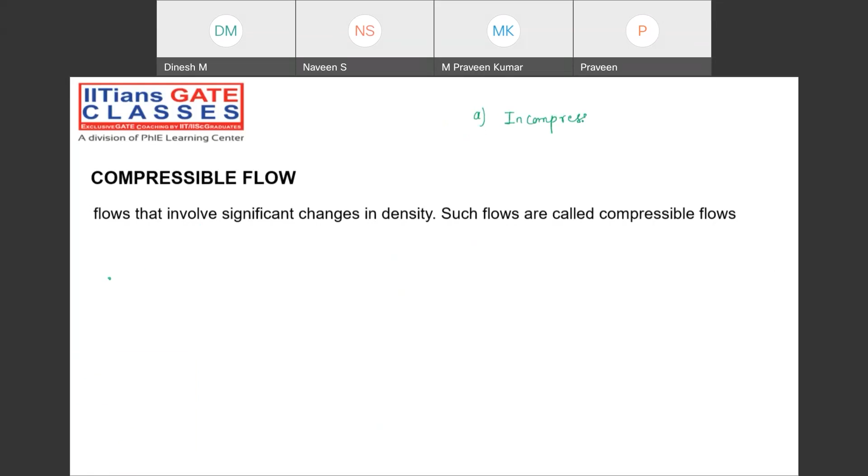First is incompressible fluid. Then incompressible flow. Then compressible fluid. So we have only two classes for this. This is the first class in which we are going to cover basics till normal shock. After that, normal shock, oblique shock, and expansion wave that we are going to cover in the next class, along with the convergent divergent section. Then we have compressible flow of fluid, and D will be compressible flow. Many times confusion will be there among these four terms only. Frequently in any textbook, you might feel confused: sometimes incompressible fluid, sometimes incompressible flow, sometimes compressible fluid, sometimes compressible flow. What is the similarity or difference between these four terms that we are going to explore now.

So tell me, guys, if I ask you, what do you mean by incompressible fluid? A very first term I will be introducing, incompressible fluid, and you must be familiar. So example, if I ask you, definitely you can say water. But apart from the example, what is the actual definition? Fluid mechanics already covered, yes or no, guys? Whether fluid statics has been covered or not - fluid property, fluid statics, and before that fluid kinematics. Then you can easily answer. I think there only we have discussed about incompressible fluid. There we defined one term. By means of that term, we are saying that if it is infinite or if it is finite, then what is the category of fluids?

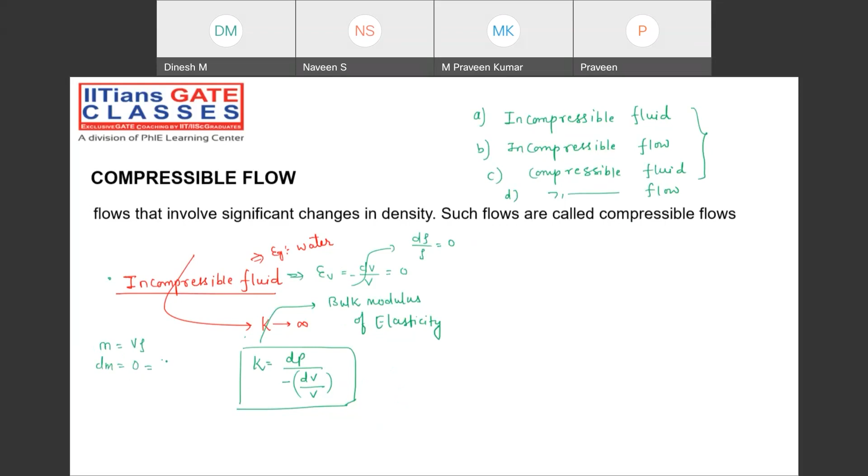Because what is the mass? Volume into density. Now if I differentiate, mass cannot be a variable quantity, it can be fixed only. So V into d-rho plus rho into dV must be 0. So d-rho by rho will be minus of dV by V. So if that's going to be 0, this is also going to be 0 for the water. And that's the reason, my dear friend, if this term is 0, then this term will be infinite. Am I right?

Tell me guys. Perfect. But the moment I will be asking you about incompressible flow, these are very few minute, very micro differences between these two. Sometimes you might be thinking that incompressible fluid will always be incompressible flow.

Yes, you are correct, but the definition of incompressible flow and incompressible fluid is different. If somebody asks you what is the meaning of incompressible fluid, you must say the bulk modulus of elasticity is going to have a large value. How much large? Infinite value. But if somebody asks you what is the meaning of incompressible flow, then you must answer: volumetric strain rate must be 0.

Sir, what is a volumetric strain rate? Volumetric strain rate is the summation of the linear strain rate in x direction, linear strain rate in y direction, and linear strain rate in z direction. Let me write once again. Volumetric strain - I think you have studied strength of materials also, right? Strain in x direction, strain in y direction, strain in z direction - they must be equal to 0.

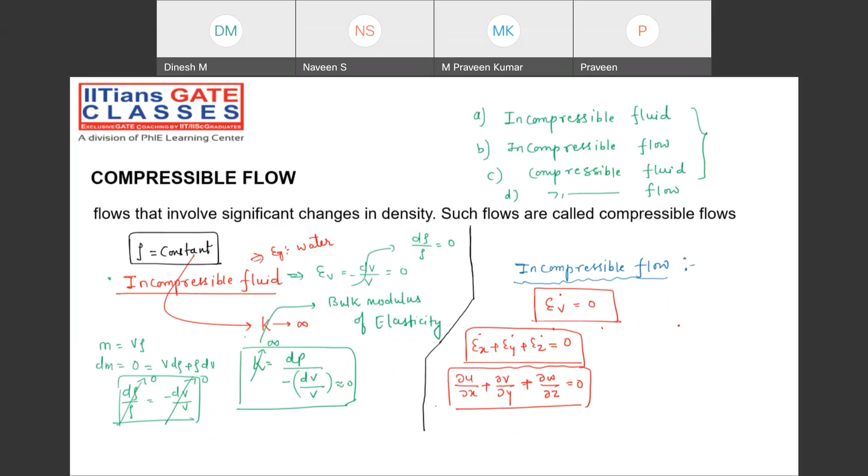Tell me guys. But does it always guarantee that whenever there is incompressible flow, that will always be incompressible fluid? Two questions I'm asking. If there is an incompressible fluid, that fluid whenever it is flowing, will it always remain incompressible flow? But one more question is there: if suppose any cross section or any place where incompressible flow is there, will that always resemble incompressible fluid, or can the incompressible flow be the compressible fluid also? Understanding what I'm asking?

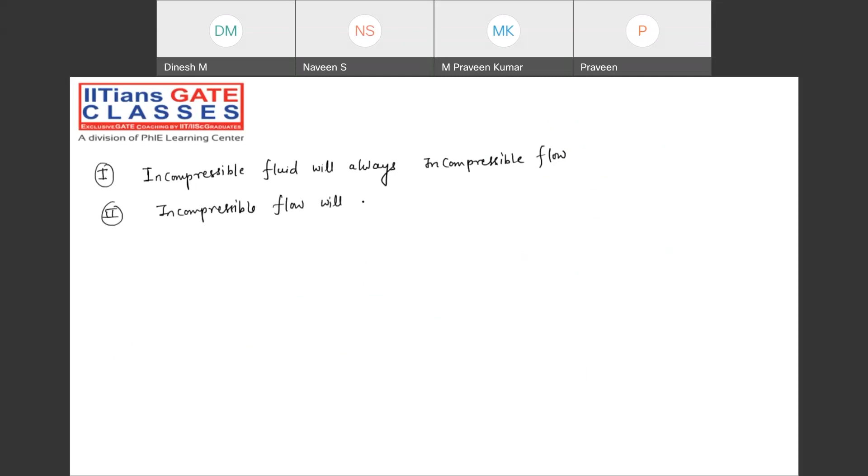Let me just summarize. Do not confuse, just see. I'm asking that: first statement - incompressible fluid will always be incompressible flow. Second statement - incompressible flow will always be incompressible fluid. Now tell me guys, whether true or false, you need to tell me.

I have given option 1 and 2 - that means the statements I have given, 1 or 2. You need to just tell me whether first is true or second is true, first is false or second is false. Most fundamental thing before discussing further about compressible fluid flow - you must be able to understand the difference between fluid and flow. That's very important, guys.

Now somebody will ask me, sir, what is the meaning of incompressible flow? The flow that has zero volumetric strain rate is called incompressible flow. Note down - is called as.

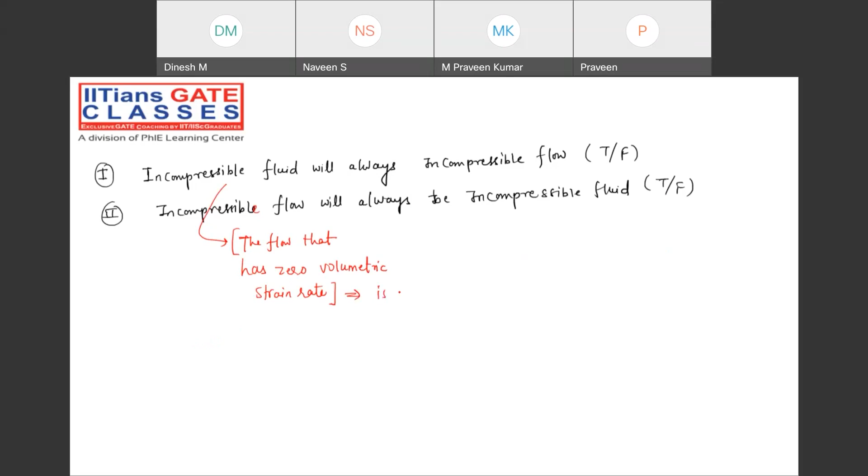Now those who have noted down the definition, please look back at the question - is called as incompressible flow. Tell me guys, very important. So again, I'm hoping that all of you are understanding. All of you understood the continuity equation, right? Generalized three-dimensional Cartesian coordinate continuity equation - all of you are aware of those equations? Fluid mechanics - all of you are aware of those equations?

So Naveen, whatever you are saying, try to reverse it. First is false you are saying, second is true - but that is not correct. First will always be true, and second will not always be true. Sometimes it can be incompressible fluid, but sometimes it can be compressible fluid also. Understanding?

So we will understand, we will try to explore these things. Do not worry about those things. So now once it is done, let me know - all of you have noted down?

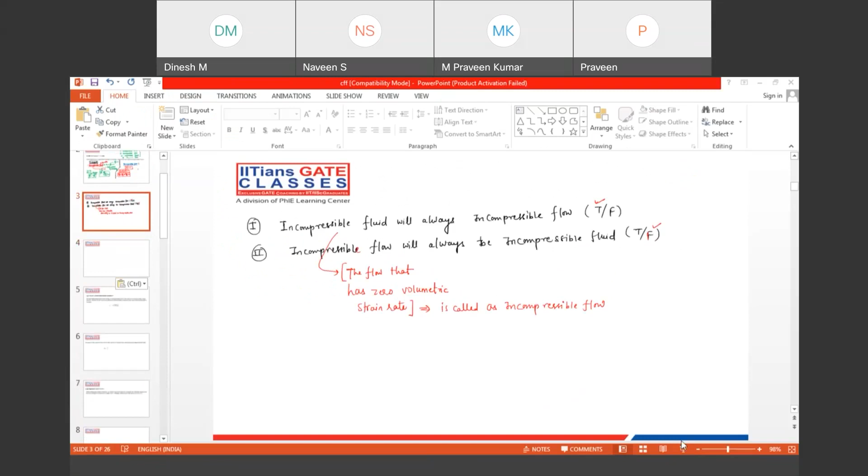So today's lecture will be an eye opener for whatever the reality actually is. Whatever the Bernoulli equation and whatever fluid mechanics we have learned, that is actually based on hypothetical assumptions we are making, that things will always be incompressible, but that is not always true.

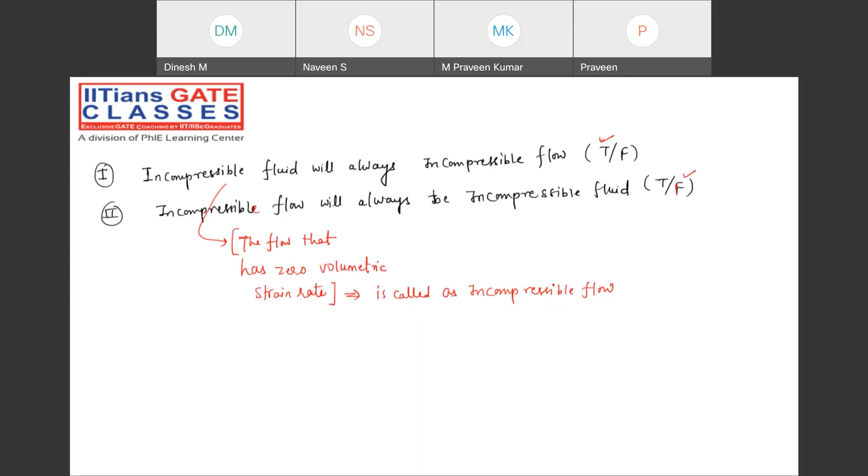Now, done, all of you? Remaining guys, are you understanding or not? Any difficulties? I'll make sure all of you can understand the concept by the end of today's lecture. Do not worry. Done? Done, all of you? Remaining guys are there? What about those guys, Praveen as well as Praveen Kumar? Are you understanding or not? Tell me, guys, I'm not getting any response from both of you. Yes? All of you can hear me? Okay, fine. But are you understanding or not? Okay, now try to understand.

I'm writing the continuity equation, and I believe you must be able to understand this continuity equation very thoroughly. Three-dimensional Cartesian coordinate continuity equation.

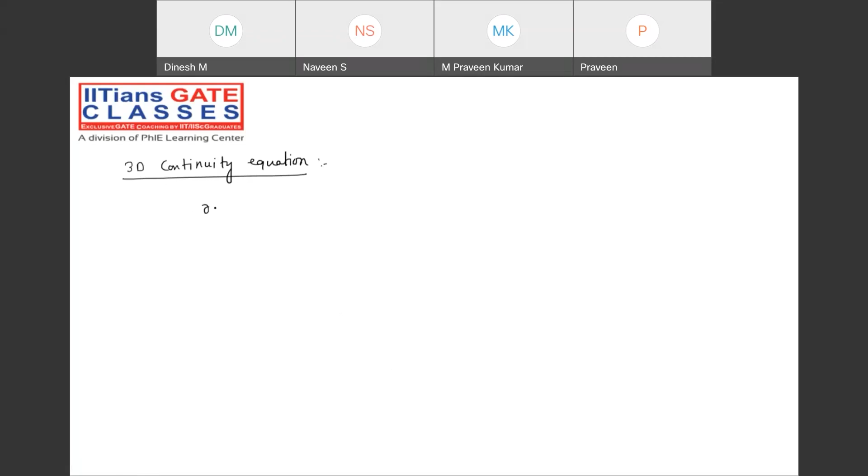So whatever we are learning now is just an extension of the chapters we have already concluded, right? So if I write the continuity equation: dou rho by dou t plus dou by dou x of rho u, rho v, dou by dou z of rho omega, that is equal to 0.

Now if I try to explore this, dou rho by dou t, plus u into dou rho by dou x plus v into dou rho by dou y, plus omega into dou rho by dou z, that is one term, plus rho into dou u by dou x, dou v by dou y, and dou omega by dou z.

U, v, omega is what? The velocity vector. Velocity vector is u i cap plus v j cap plus omega k cap. This is the velocity vector in the three-dimensional Cartesian coordinate system, that means along the x-axis, along the y-axis, and along the z-axis.

All of you are aware of this equation or not? These two equations give us what? This equation - this is the three-dimensional continuity equation. Perfect, my dear friend.

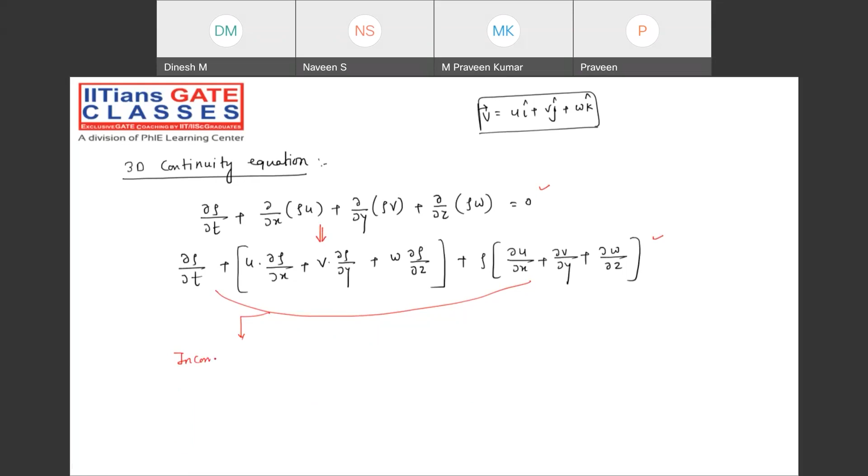From here I can conclude two things. What are the two things I can conclude from here? One, suppose there is an incompressible fluid. That means density will be constant.

If density is constant, my dear friend, then whether you differentiate it with respect to time or with respect to any space coordinate, it will be 0. Am I right? Will be 0, right? Check it out, please. All of you, please check it out.

If that goes to 0, this term will be 0. This whole term will be 0 for this particular incompressible fluid. That means what can we infer from here? We get dou u by dou x plus dou v by dou y plus dou omega by dou z equal to 0.

Indirectly, we are moving towards the volumetric strain rate being 0. That means whenever any fluid is an incompressible fluid, it will always be an incompressible flow. Remember, we are talking about the flow.

That means per unit time, things change very frequently. That's why we define not volumetric strain, but volumetric strain rate, because volumetric strain is more significant in solid mechanics, where there is a fixed amount of deformation. But here, even if you apply just 1 Newton of force, the fluid element keeps on deforming continuously. In fluid mechanics, in the first chapter, you might have learned the difference between solid and fluid properties - fluid is an element which deforms continuously under the action of even a small shear force.

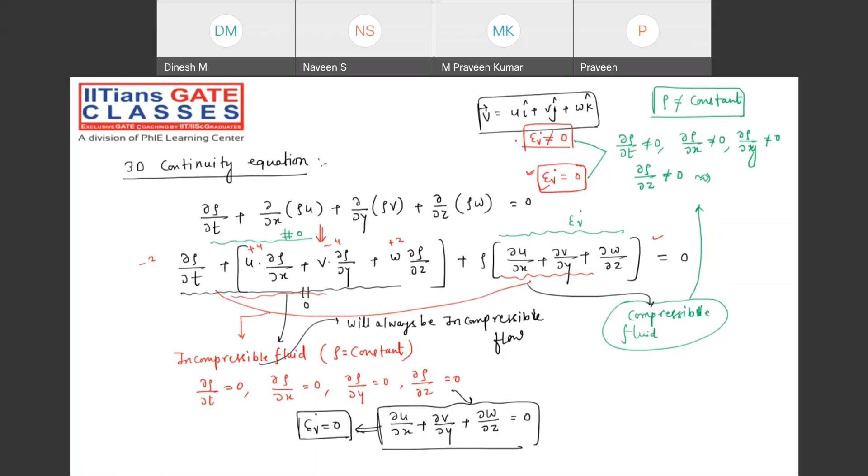Or they will be having such non-zero values so that they will not cancel out with each other and they will not be equal to 0. If that will not be equal to 0, this term will not be equal to 0, this term will also not be equal to 0. In that case, volumetric strain will not be equal to 0. And if that is so, then this is called compressible flow.

And this is nothing but incompressible flow.

So compressible fluid will never guarantee the flow to be what? Compressible and incompressible—it can be anything. But if there is an incompressible fluid, it will always guarantee you that you will be getting incompressible flow whenever it is flowing, either it is flow over the flat plate or it is flow through pipes. Check it out.

All of you, please check it out, whether you are understanding or not.

So these things, if you try to learn from books—suppose Frank M. White or Cengel, Yunus Cengel, or T.K. Naik, or K.L. Kumar—you will not find that much clarity, even though they have given everything in detail, but you need to read multiple times. Again you need to waste a lot of time searching whether it is a compressible flow.

Sir, what is the meaning of incompressible flow? That clarity is not there when you read the textbook, right? Even standard textbooks, even NPTEL videos—that is my challenge—you'll be having difficulties, because when I used to learn these things, I had the most challenging task to find the difference between this type of fluid and flow.

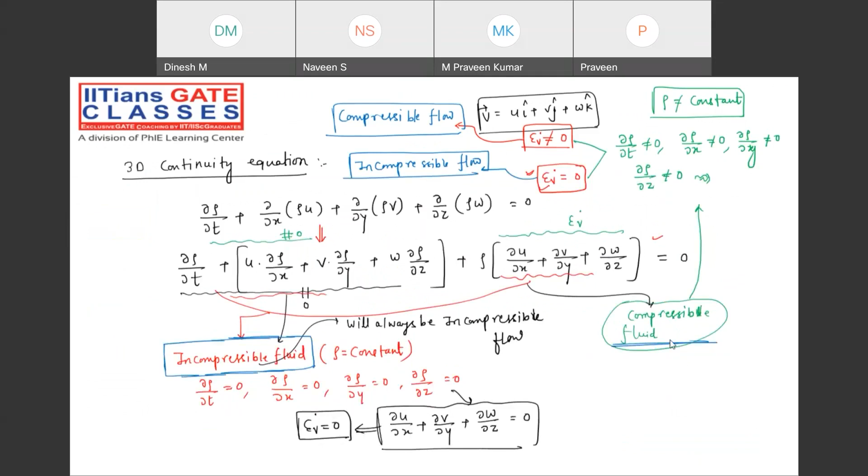So, before development of this speed of sound, does anybody know the difference between ideal fluid and ideal flow?

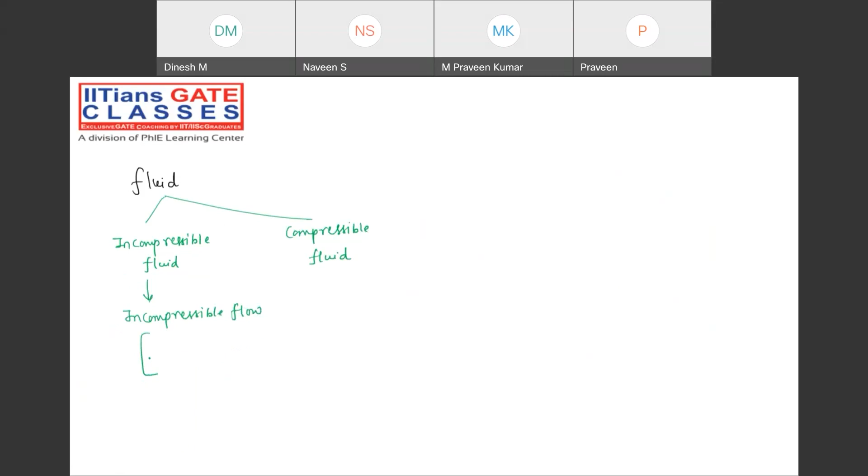So note down, guys: we have the fluid. The fluid can be compressible fluid, or the fluid can be incompressible fluid. Suppose incompressible fluid is there, then it will always resemble incompressible flow, that will be the same as incompressible flow. That means, from now on, whenever the density change is less than 5%, we call that type of fluid flow incompressible fluid flow. Note down, guys: wherever the density change is less than 5%, we say it is an incompressible fluid, or incompressible fluid flow. On the next hand, what do we have? Compressible fluid.

Compressible fluid can have two categories: it can have compressible flow, or compressible fluid can be incompressible flow. In that case, the change in density will be more than 5%, or we can also say Mach number will be more than 0.3. In this case we say Mach number will be less than 0.3. What is Mach number and all, we will discuss, do not worry.

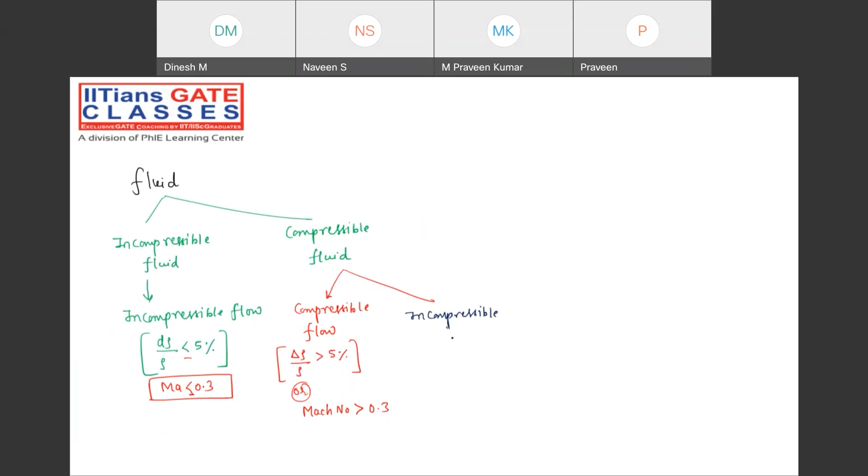Second thing, we have compressible-incompressible flow. When I talk about this, even though the fluid is having a lot of density changes, that density will not change more than 5%, it will be less than 5% only. That means Mach number will be less than or equal to 0.3. Such a fluid flow we call compressible fluid with incompressible flow. Note down, guys, very important: even though fluid is compressible, even though density has changed, that change will not be that high, not more than 5%. If it is more than 5%, we say it's a compressible flow.

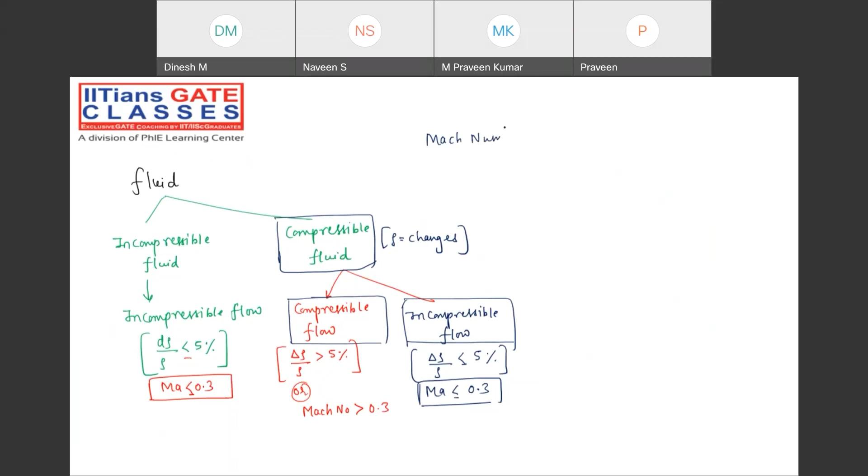Tell me, guys, so note down, very important. Here, just note down the meaning of Mach number. We will discuss it in detail later, but just note: what do you mean by Mach number? Velocity of the fluid flow divided by velocity of sound. That means we say V by C.

Speed of sound, similar to speed of light, is 332 meter per second, or 340 meter per second, or 336 meter per second - that is the value you are observing. The ratio of velocity of the fluid flow to velocity of sound is called Mach number, right?

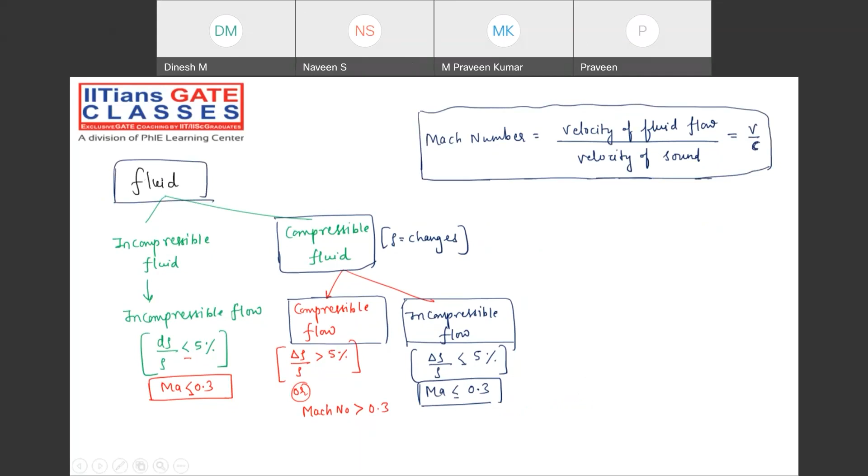Very important: so we have many types of flow, guys. We have incompressible flow, compressible flow, subsonic flow, sonic flow, transonic flow, supersonic flow, hypersonic flow - lots of flows we have.

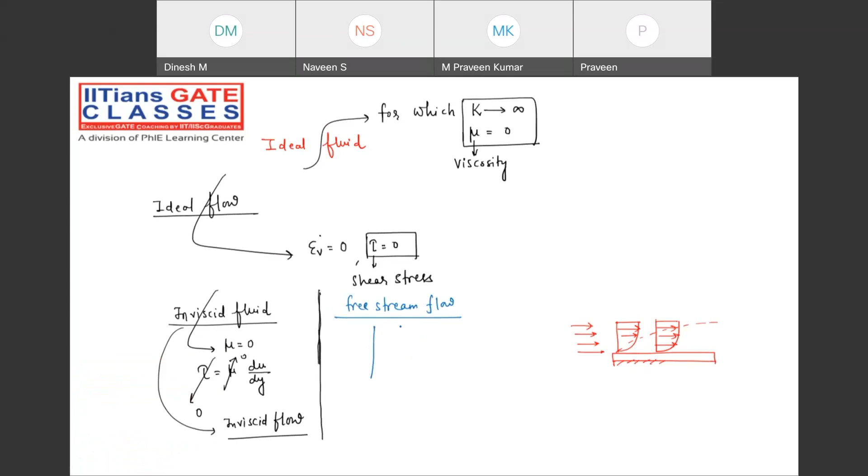If suppose you are taking free stream flow, suppose you are taking free stream flow. Free stream flow means what? Free stream flow means the velocity profile for which it will be something like this, meaning each and every fluid layer will be having the same kind of velocity.

du will be 0, du/dy will be 0, mu will not be 0. See, mu will not be 0. This is the ideal case; suppose this is a real fluid, this is nothing but a real fluid you are taking for which mu is not equal to 0. But due to some circumstances, it is making the velocity profile to be something like this. I can say that whatever flow is approaching towards this particular flat plate is free stream flow. Am I right?

Above the boundary layer, or in front of it, the moment it's touching the flat plate, that is a free stream flow. And what is the surrounding air having? Viscosity that is not equal to zero. You can check in Google, just search the viscosity of air, that will not be zero. That is going to have some particular value. Viscosity is not equal to zero, but because of that, tau will be zero again, because du by dy will be zero. That means tau will be zero. So again, it is just resembling like free stream flow resembling like ideal flow.

Note down, guys, very important: ideal flow, because tau is zero. Very important guys. So is that clear, the difference between ideal flow and ideal fluid? Both are not same, both are different, but ideal fluid will always be ideal flow.

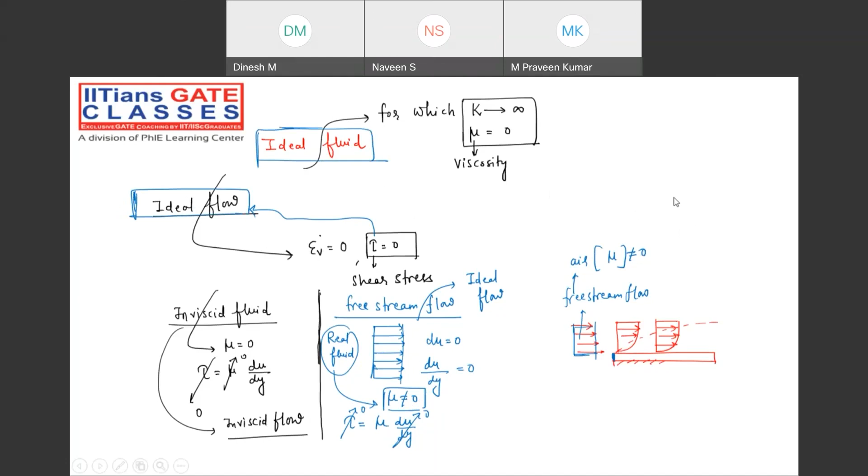But what is the physical meaning of speed of sound with respect to fluid mechanics? Tell me guys, if I ask what is the meaning of speed of sound, then what will you say? So for understanding this, let me discuss one beautiful thing about the speed of sound. Suppose you are taking a piston cylinder arrangement. Remember, speed of sound has significance in compressible fluid, not in incompressible fluid flow. Why? That also we are going to learn, my dear friend, do not worry.

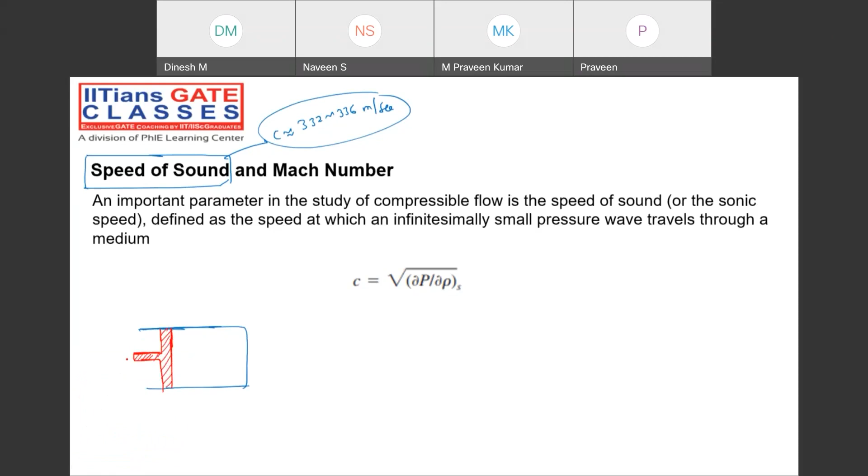So try to understand, there is a piston cylinder arrangement. This cylinder is fitted with a piston. This is what we have, cylinder, my dear friend. Now try to understand, suppose here we have the fluid, any fluid. I'm not taking compressible or incompressible, I'm just taking fluid, maybe you can consider compressible fluid.

Now, the moment you try to press this piston in the positive x direction, it is going to compress this particular fluid. The moment you compress it, then suddenly what will happen? There is a kind of wave that will propagate through the fluid medium. The moment you move the piston, there is a movement of pressure wave, or pulsating wave, or elastic wave, through the fluid medium.

Suppose somebody is not able to digest this, sir, we already learned the piston cylinder in thermodynamics, there we never came across, apart from pressure and temperature, this pressure wave or elastic wave. See, whenever you try to compress it like this, there is one kind of disturbance wave that will propagate. The disturbance wave will propagate along with the movement of the piston. The speed with which this pressure wave, this disturbance, is propagating, that is called speed of sound. The speed with which this fluid is flowing, suppose that velocity v, and the speed with which this disturbance is propagating, there is some significant correlation between this velocity and the speed of sound, and that is what we are learning in this chapter. So please note down, the speed with which this pressure wave and elastic wave propagate through the fluid medium is called speed of sound.

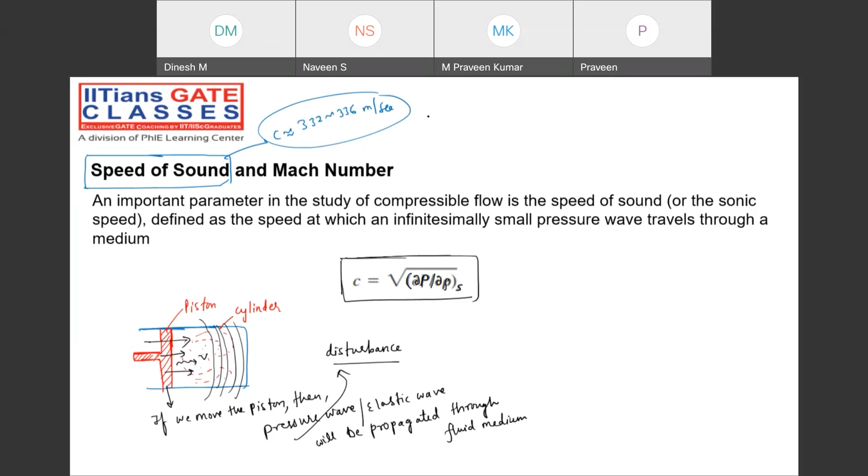Now tell me, why are we calculating the speed of sound, why are we calculating the disturbance in absence of any irreversibility and any non-adiabatic conditions? What is the meaning of isentropic flow? What is the meaning of isentropic process? What do you mean in thermodynamics about the isentropic process? Is any process called isentropic process, or is there some specialty about this process? Can I say reversible plus adiabatic process?

This is called the isentropic process. Can we call a reversible plus adiabatic process an isentropic process?

I'll ask you two statements, true or false. First statement: all reversible and adiabatic processes are always isentropic processes. Second statement: all isentropic processes are always reversible and adiabatic processes. Tell me, is statement 1 true or false? Is statement 2 true or false?

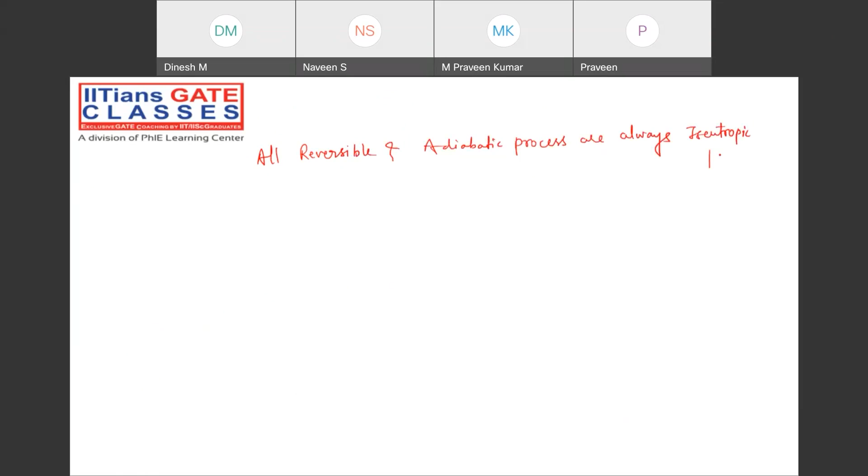I'm asking you: all reversible and adiabatic processes are isentropic processes. That is my first statement. Let me write it: all reversible and adiabatic processes are always isentropic processes. That is my first statement.

Second statement: all isentropic processes are always reversible and adiabatic processes. Tell me, guys, this is statement 1 and 2. You need to tell me true or false.

So the first statement is true, that is correct. What about the second statement? I want the answer from all of you guys. You are there, please try to respond - Praveen and Praveen Kumar, all of you. Do not sit idle, guys. Try to respond as quickly as possible.

Tell me, guys, quickly - remaining guys. The second statement is false. Why is the second statement false? There is a reason for that. Let me explain the reason.

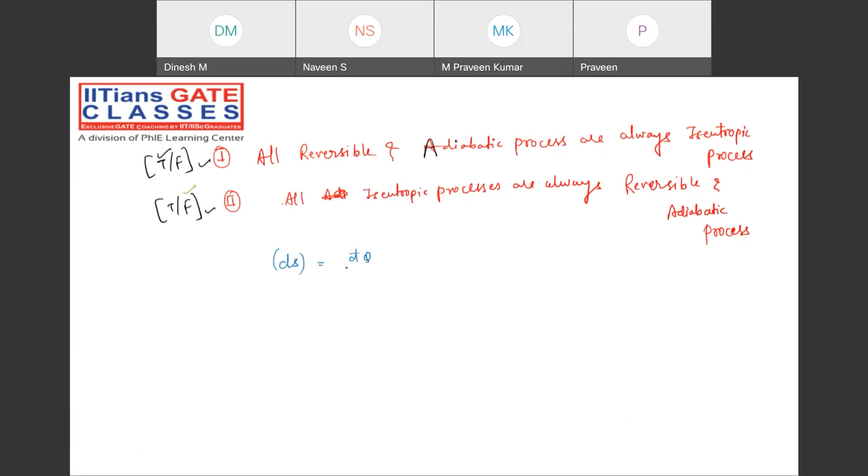What is the total entropy change for any process? Delta S of any system equals dq by T plus entropy generation. That is what we learned from the second law of thermodynamics, right?

If I say reversible, what does that mean? Entropy generation will be zero. There will not be any friction - a frictionless process will be called a reversible process. This term will be zero for reversible.

What about this term being zero for adiabatic? This term will be zero for adiabatic, my dear friend. So in short, both will be zero - we can say this will also be zero. An isentropic process is that process where the total change in entropy will be zero. Total change in entropy will be zero. That is about the first statement.

Now move back to the second statement. They are saying all isentropic processes means dS equals dq by T plus entropy generation, and this will be zero. My dear friend, this can be zero when this is minus 5 and this is plus 5 - through that also it will be zero, or this will be zero and this will be zero, and in that case also it will be zero.

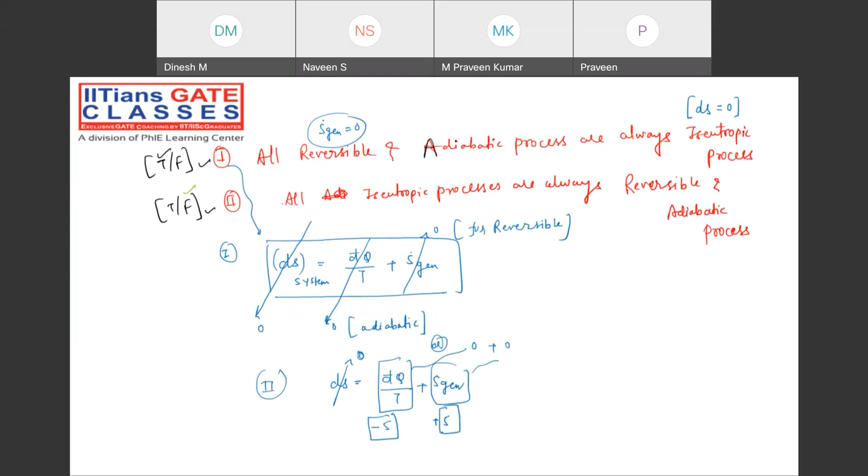But in this particular case, suppose you are talking about a situation where there is a transfer of heat from the system to the surrounding by 5 kilojoules per Kelvin, and there is some kind of friction. Because of that, there is some entropy generation happening of 5 kilojoules per Kelvin. Together they will cancel out, and again that will be zero. So for all isentropic processes, dS being zero will never be guaranteed to mean it is reversible and adiabatic, because here you are saying that it is a non-adiabatic process, right?

It's a non-adiabatic process, and because entropy generation is more than zero, that means it's an irreversible phenomena, not reversible, am I right? All of you understanding the subject or not? That's why I told you before moving to this compressible fluid flow topic, you must revise thoroughly the thermodynamics and fluid flow.

Because if you don't believe me, I'll be proving one statement about stagnation enthalpy, and there I will challenge you. Most of you will be confused about the adiabatic process and isentropic process. Those who say adiabatic process is always isentropic process are incorrect, because irreversibility can also make the system non-isentropic, right? So please note down a few basics about thermodynamics.

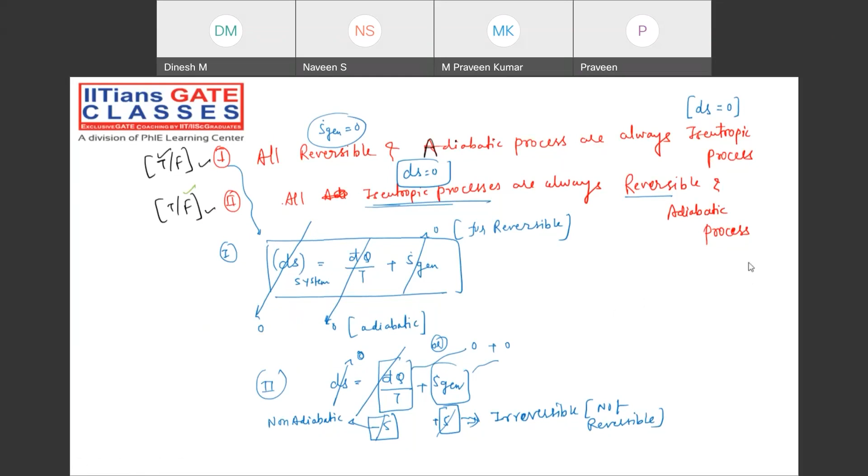So note down, speed of sound is defined as dp by d rho under isentropic condition. Now the question is why we are calculating dp by d rho under isentropic condition. When entropy is constant, why are we calculating speed of sound this way? Because in that case, it's a frictionless process, an adiabatic process. There is no friction, no heat transfer to the surrounding, so whatever the true nature of the speed of sound or the disturbance is, that can be obtained from the system.

If there is friction, the friction wave will also propagate. If there is heat transfer, that will also be seen along with this disturbance propagation. So the true nature cannot be expected from the disturbance in that case. But if it's a frictionless process, no heat transfer, a completely insulated system, then we can see the true nature of the disturbance. That's why we are calculating it this way.

In fact, we can calculate speed of sound under any condition — under isothermal condition also we can calculate it, under any process. But from the most idealistic and beneficial research point of view, if you consider the isentropic condition, you get the true reality of the disturbance or the motion of the disturbance wave, which is a very good idea, right? So that's the reason we always say speed of sound is dp by d rho under isentropic conditions. Please note down.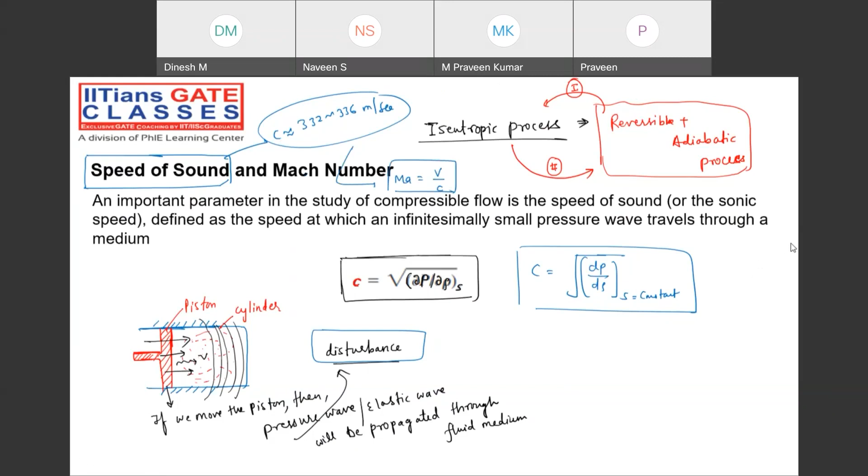And of course, we have noted down about the Mach number. Mach number is basically the ratio of the velocity of fluid to the velocity of sound. So the ratio of the speed of fluid flow to the speed of sound is defined by the dimensionless number Mach number, V by C.

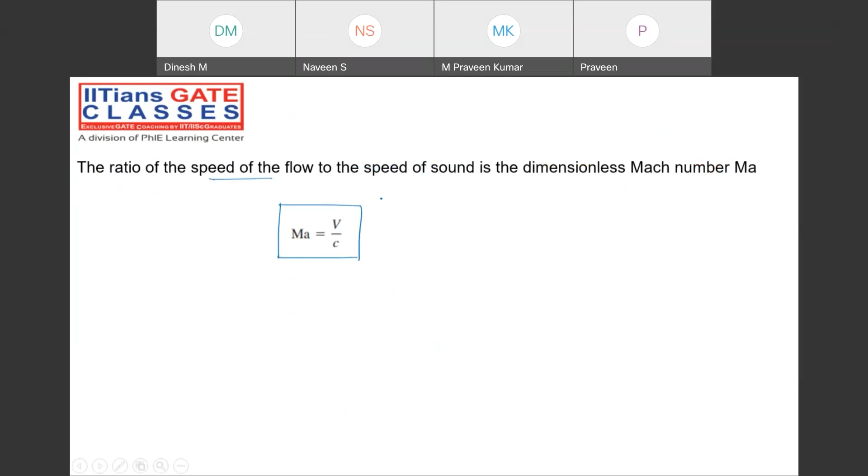Now we will try to prove the speed of sound, that is under root of dp by d rho, by two processes. One I am taking as isothermal process, and second I am writing under isentropic process. Under these two conditions, we are calculating the speed of sound.

We have to calculate dp by d rho, and we are calculating it for an ideal gas. So we are going to use the ideal gas equation. For the ideal gas equation, first, what we are going to learn: isothermal process, PV equal to constant, am I right? PV will be equal to constant. In fact, PV equal to MRT.

So P into V by M equals RT. What is V by M? Specific volume equals RT. Can I write P by rho to be constant? T is constant, that means what? Can I write P by rho to be constant? Yes, P by rho to be constant.

Perfect. Now try to differentiate. So P into -1 into rho to the power -2 into d rho, plus rho to the power -1 into dp, that will be equal to zero. So from here, what is dp by d rho? It will be brought back to that side, this particular term will be brought to the right hand side. So from here, what can we calculate?

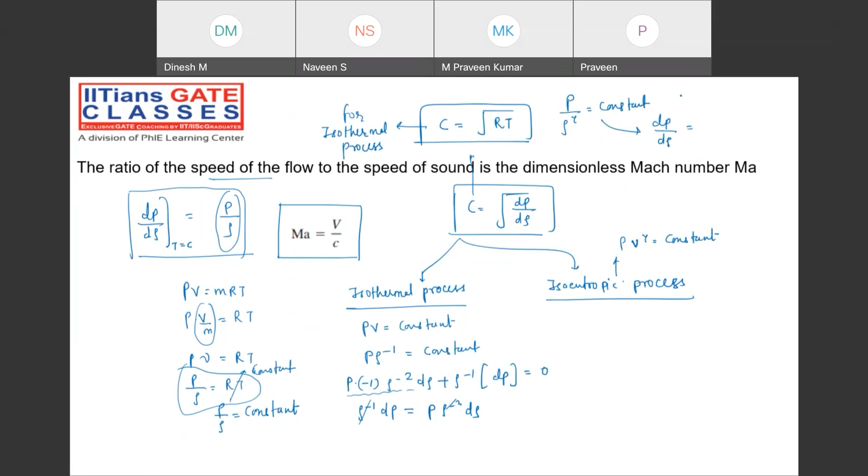Isothermal process done. Now if I talk about the isentropic process, that means P into V to the power gamma equals constant. Here, V is the specific volume, so we can also write P by rho to the power gamma equals constant. Now if we differentiate this, dp by d rho comes out to be gamma P by rho.

So the C value for isentropic process will be under root of gamma RT, where gamma is the specific heat ratio. We also call it the adiabatic index, right? So these are a few terms coming from thermodynamics that you must understand.

So now we have two formulas for the speed of sound. One is for the isentropic process, and one is for the isothermal process.

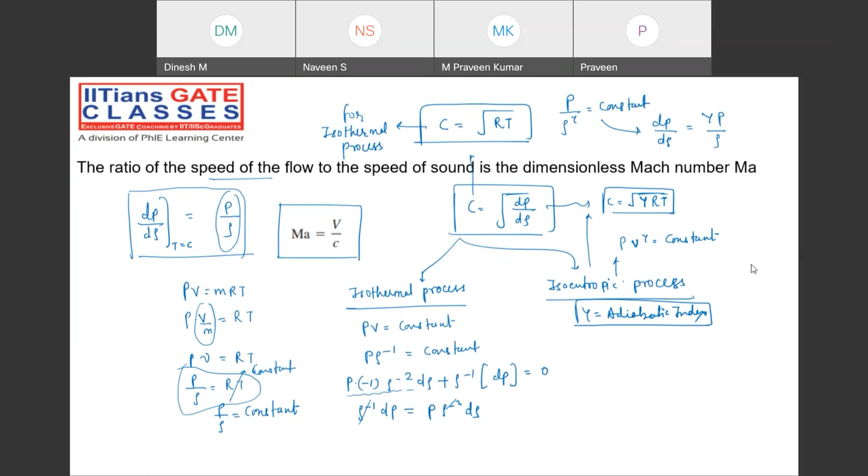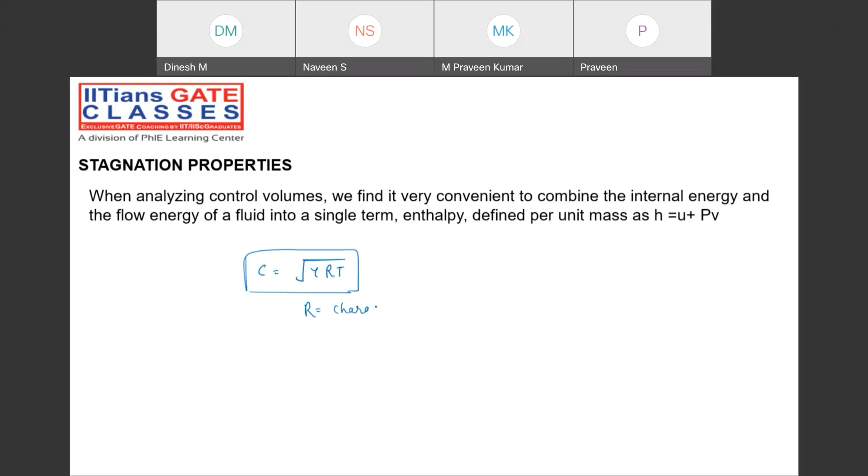Now, before understanding stagnation properties, we will understand gamma RT, under root of gamma RT. What is the meaning of this? In this, R will be the characteristic gas constant, and that is equal to Ru by capital M, where M is the molecular weight. So from here, what can you calculate? Speed of sound.

What conclusion can you make? If molecular mass is more, then R will be less. R will be less, so C will be less. That means lesser mass, more will be the sonic velocity. Lesser mass means more sonic velocity, or you can also say more mass means less velocity.

Speed of sound we also call sonic velocity, right? All of your understanding this?

One more question they have asked in the ISRO examination: is the speed of sound more in a warm season or a cold season? In which case, hot environment or cold environment, will the speed of sound be more? So through this you can answer: when the temperature is more, the speed of sound will be more for constant gamma and R. This question was asked in ISRO, I think in 2016.

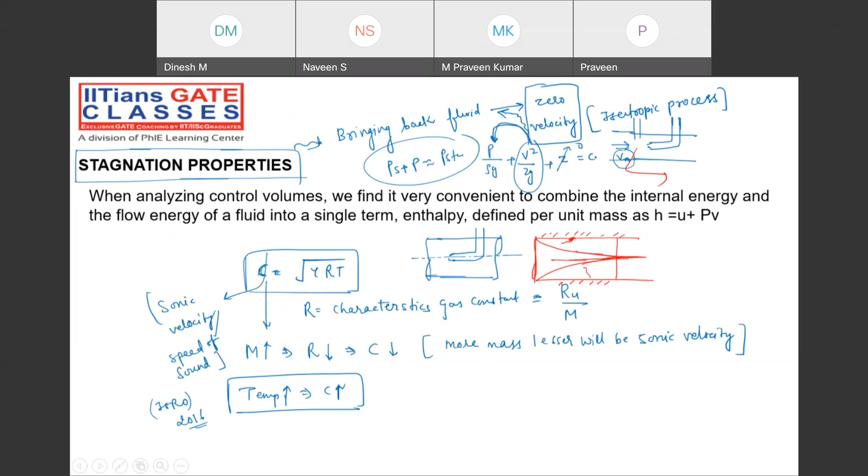So guys, let me ask you one more question. So we have understood the pitot tube, right? All of you have understood the pitot tube, right? Tell me, guys. So can I ask you one question? Very basic question, very basic, but very, very important question.

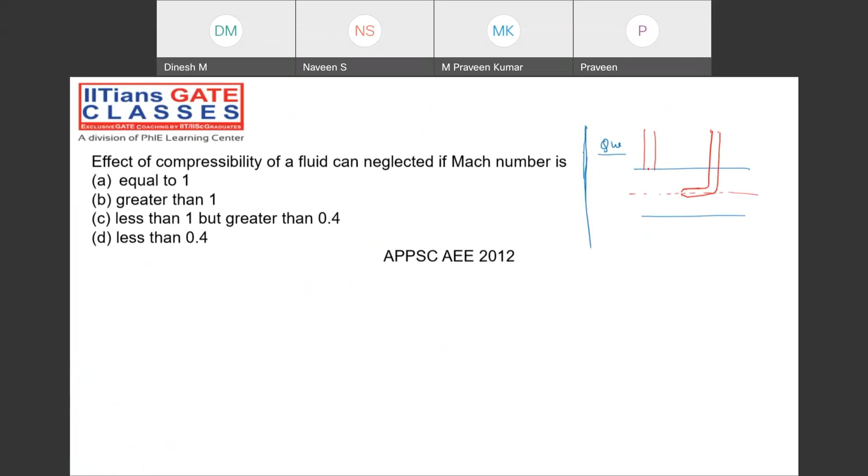This is the pitot tube, which is placed with the piezometer. Now tell me, guys, fluid is flowing with some velocity V. My question is, what is the discharge through the pitot tube? What is the value of the discharge through the pitot tube? So here, let's suppose the rise of height is h1. Here also the same height is there, but an additional rise is there because the fluid is brought to rest condition, and that we call h2. Here also the same, it is h1. So here I can ask you two questions.

That is the first question. Second question, what is the discharge through the pipe? So for both, I'm giving option A. Now forget about this question, focus on the question I mentioned right now. The discharge value will be under root of 2gh2. Suppose the diameter of the pipe is d.

That is the one value. Option B: discharge will be under root of 2gh1, pi by 4 d square, and pitot tube is going to have the diameter. Here the diameter is what? Let's suppose d2.

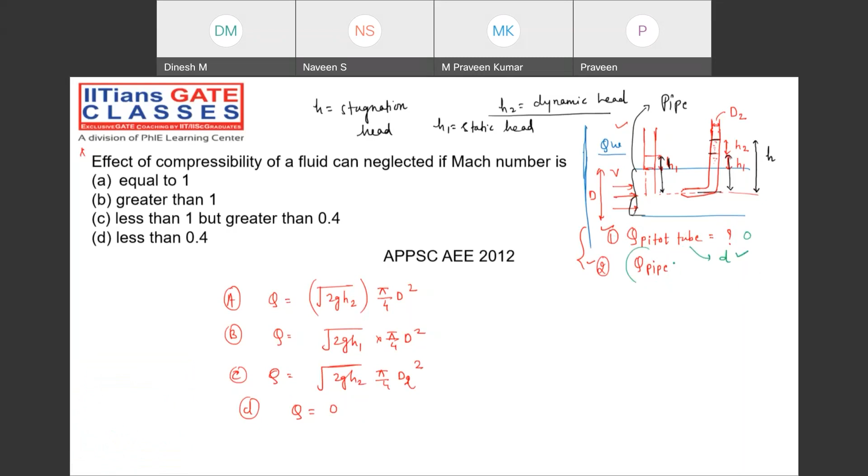Absolutely correct. And what about the pipe? Pipe, you know that area into velocity, and you know how to calculate the velocity: under root of 2gh dynamic. And here, what is the dynamic height? h2 only, right? So can I say this option will be A for the second one?

Area into velocity. What is the area? Pi by 4 d square. That will be the correct answer.

Because suppose if you have not understood like this, only understood the formula of velocity by applying the Bernoulli equation between point 1 and 2, you are in the wrong path. In the GATE examination this year, what question did they ask? They have given the pipe, and in that they have placed a uniform diameter tube.

Most of the candidates thought that it is a pitot tube. It is not a pitot tube. They mentioned clearly in the problem that it is a uniform diameter tube. That means here and as well as here, the diameter is same. When the diameter is same, how dare you say that the fluid element will be brought to the rest condition?

Here the fluid element, you can say it's brought to rest because of the very, very narrow area. The fluid is flowing like this, but it cannot flow through this particular pitot tube. Very slowly it will flow, almost with a negligible velocity.

Here, whatever the tube they have mentioned, they mentioned clearly the velocity, and they ask: what is the velocity? They already mentioned what is the velocity clearly in that picture. Through that also, somebody got the idea - velocity they mentioned, that means they have some options. And the option they have given is: what is the discharge through this particular tube, they ask.

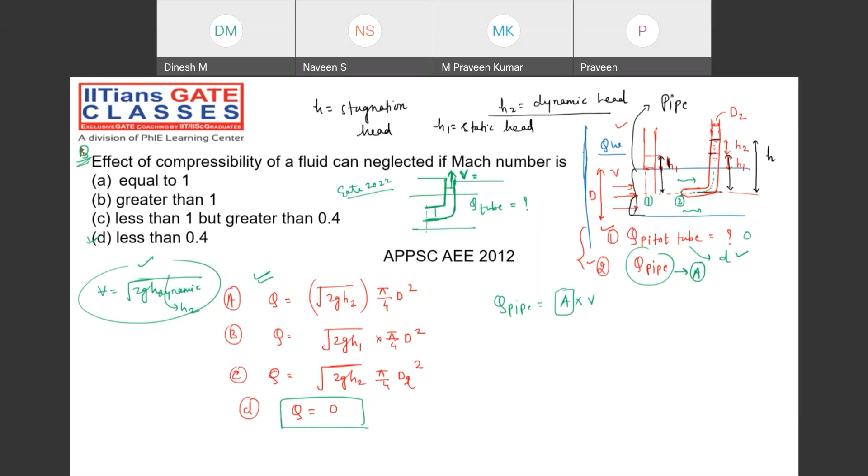Now try to answer this question and tell me the answer. Air at 300 degrees centigrade at 7 bar is expanded isentropically until the velocity is 300 meter per second. Calculate the static temperature of the air at the high velocity condition.

That is a very good question. Those who understood fluid mechanics can answer this comfortably. But before that, you must understand what is the meaning of static temperature and stagnation temperature. So just wait, let me discuss one important point, then we can discuss this question.

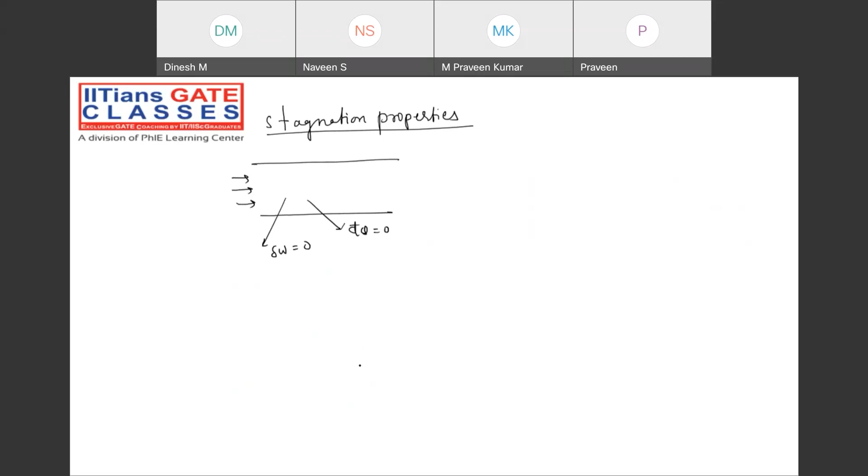Now try to understand stagnation properties. Consider the flow is flowing through the duct. Consider a fluid is flowing inside the duct where the work done is zero and there is no heat transfer. In that control volume, if you just consider the control volume in that pipe, the work done is zero and there is no heat transfer. Apply the steady flow energy equation.

All of you know the steady flow energy equation between points 1 and 2. I'm assuming the flow to be steady, not unsteady. Now, while applying the steady flow energy equation: H1 plus V1 squared divided by 2000, plus delta Q, is equal to H2 plus V2 squared divided by 2000, plus delta W. Delta Q will be 0 and delta W will be 0.

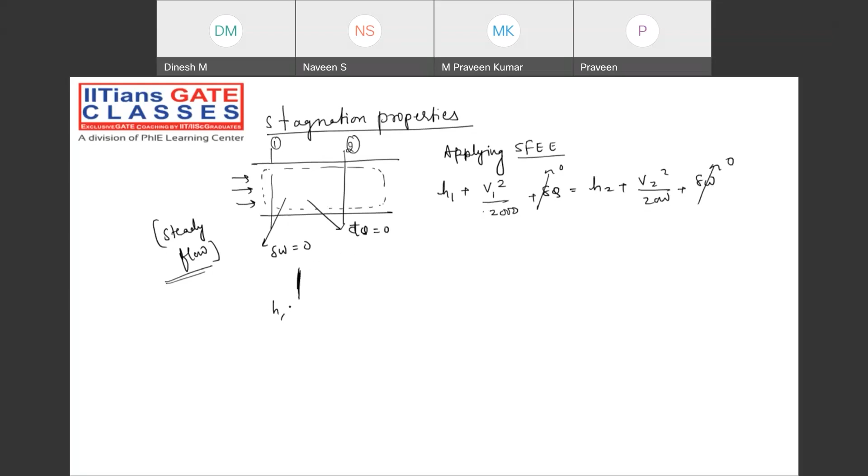Suppose, my dear friend, at condition 2 we are bringing this fluid element to rest. At point 1 we have properties H and U, but at condition 2 the velocity is 0. Then whatever H2 is, that H2 will be converted to stagnation enthalpy.

So what is stagnation enthalpy? It is basically the summation of static enthalpy and kinetic energy. Note down: we can simply write H stagnation as H plus U squared by 2. Whenever the fluid is brought to rest condition, we call it stagnation enthalpy, and we represent it by H naught. Very, very important, guys, note down.

Suppose in any device there is no heat transfer and no work done. Then what happens? H1 plus V1 squared by 2 equals H2 plus V2 squared by 2, and potential energy we have neglected. Under this condition, this is nothing but H01 equals H02 — stagnation enthalpy at point 1 will be equal to stagnation enthalpy at point 2. Check it out, all of you please verify it.

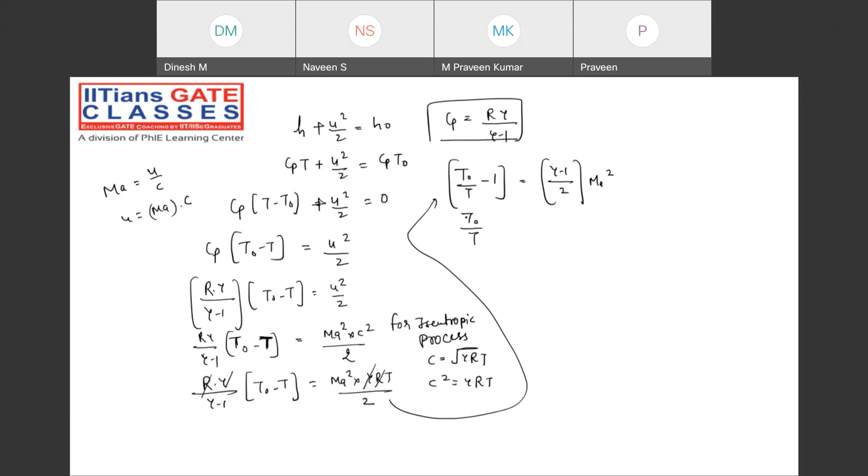T naught by T minus 1, that will be equal to gamma minus 1 by 2 into Mach number square. So T naught by T equals 1 plus gamma minus 1 by 2 Mach number square. Check it out - this is a very, very important formula, guys. Many times in ISRO examination, they have asked this question. This is the relationship between static temperature and stagnation temperature.

Static temperature - relationship between static temperature, stagnation temperature.

Understanding my point? Suppose fluid is flowing, whatever the temperature of the fluid is there, that is the static temperature. Suddenly it is brought back to the condition where the velocity is zero. Whatever the rise in temperature will be there, that is what T naught. Understanding my point? Whether these fluid mechanics things are clear or not, tell me guys. Yes, perfect, perfect. So stagnation temperature will always be more than static temperature.

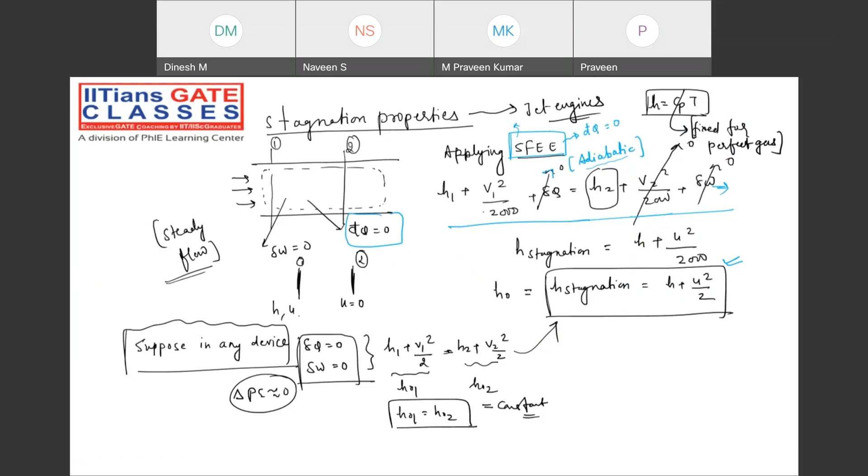So that's the reason from there only we derive this condition. That's why we are saying it is valid for reversible as well as irreversible process also. Note it, guys, very very important.

After that, we will be moving on to the relationship between stagnation pressure and static pressure. So one formula is this one. This is very, very important.

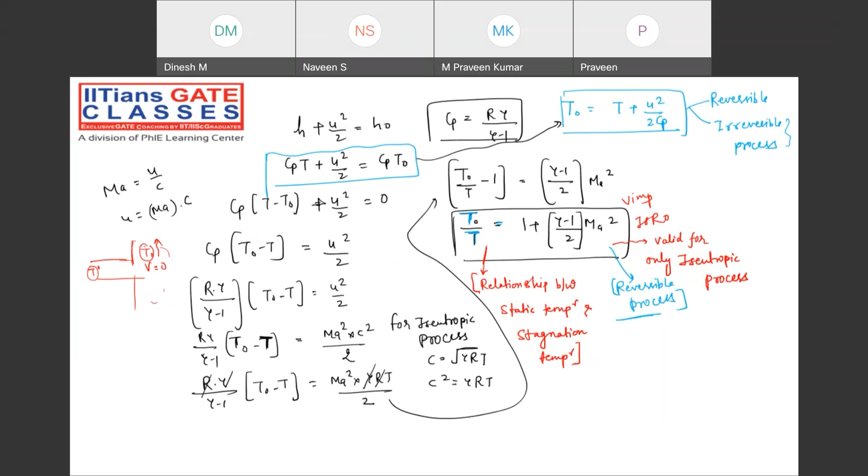Done, all of you? Can I move to the next segment? Perfect, perfect. Now try to understand.

For isentropic process, let me give you one important tip. Whatever PV to the power gamma, PV to the power gamma is valid only for isentropic. So those who are thinking it is valid for adiabatic process - no, no, no. For applying this, the process must be reversible and adiabatic. So please note down, it is only valid for isentropic process.

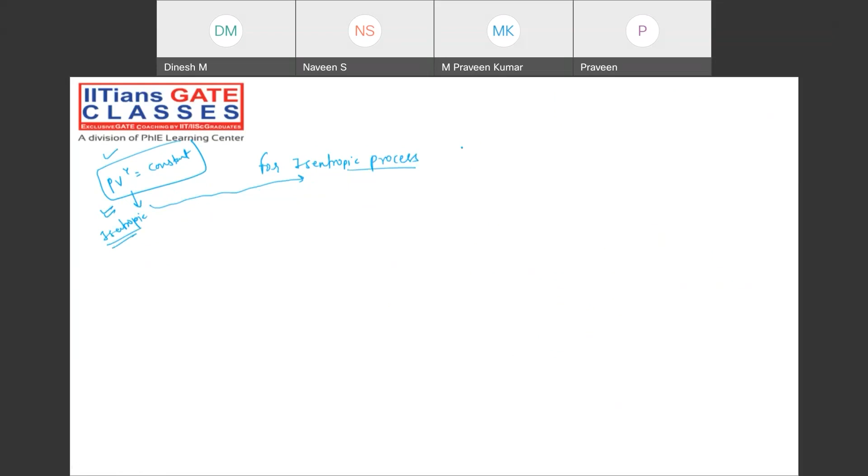So there is a misconception that it is valid for adiabatic. No. For isentropic process, we know that T2 by T1 equal to P2 by P1 to the power gamma minus 1 by gamma.

So from here, what we can write? Suppose T2 is a temperature where the fluid is brought to the rest condition. So we can write T naught divided by T equal to P naught divided by P to the power gamma minus 1 by gamma. So P naught divided by P can be written as that power gamma by gamma minus 1. Very, very important, guys, please note down - the relationship between stagnation pressure and static pressure.

The relationship between stagnation pressure and static pressure. Now, if you just want to write in terms of Mach number, that also you can write. T naught by T from the previous formula: what is T naught by T? 1 plus gamma minus 1 by 2 into Mach number square.

So you can write from here also, my dear friend, raised to the power gamma by gamma minus 1. That also has been asked multiple times in ISRO examination. Very, very important, guys. Once it is done, let me know.

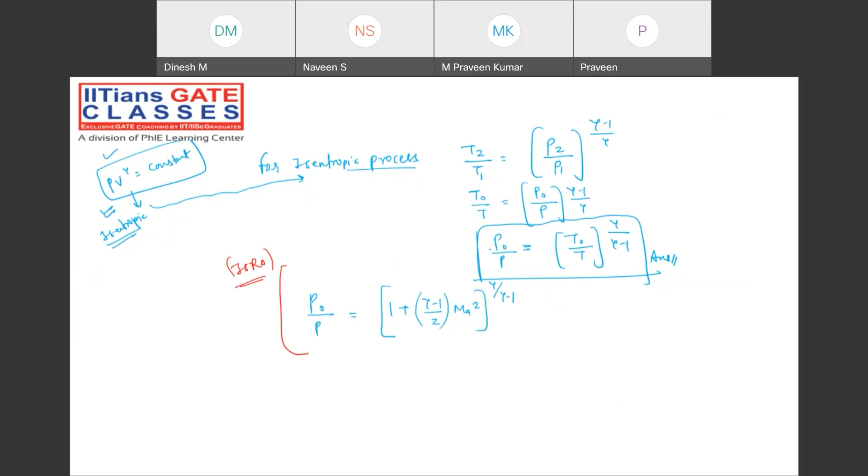Done, all of you? Is it done? Now I think you must be comfortable in solving this question, and let me know the answer for this question.

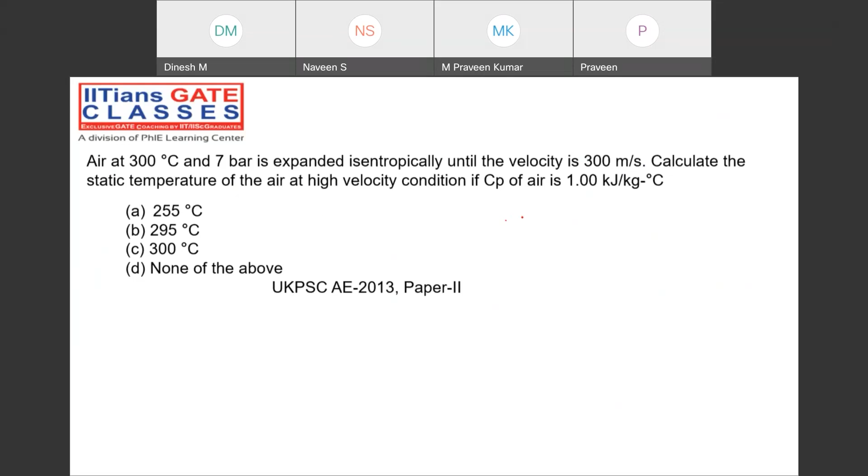Air is expanded, suppose in a nozzle, from condition 1 to condition 2. At condition 1, the temperature is 300 degrees centigrade, and the pressure is 7 bar. It is expanded isentropically until the velocity becomes 300 meter per second. Calculate the static temperature at that location, if Cp value is given as 1 kilojoule per kg Kelvin.

Very, very important. At least try to participate. Seven bar, 300 degrees centigrade. From there, it is expanding to a velocity - inlet velocity you can assume to be negligible since they have not given it, that means assume to be negligible.

Try to calculate, try to use steady flow energy equation. There is no work done, there is no heat transfer, nothing is there. So H1 plus V1 square by 2000 equals H2 plus V2 square by 2000. For air, we can write...

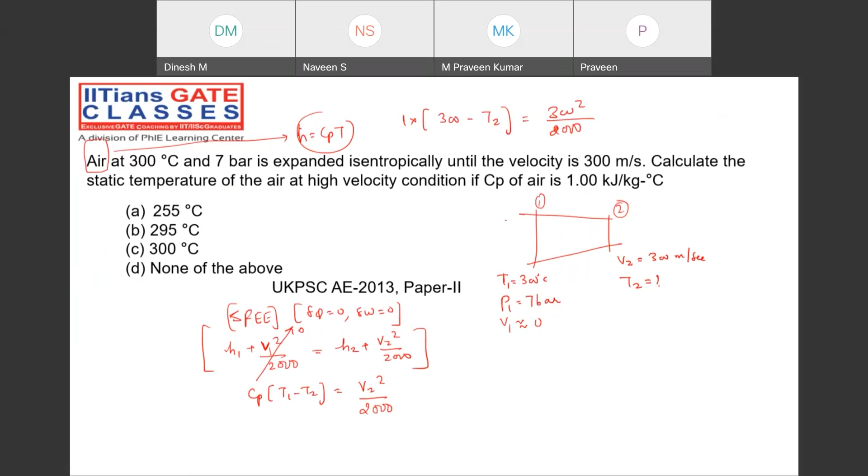255 degrees centigrade. Check it out, all of you, please check it out.

I'm asking you what is the Mach number at location 2. What will you say?

What is the Mach number? It is V2 divided by C2. What is C2? It is under root of gamma R T2. Gamma is known to you, 1.4 for air. R is known to you, that is 0.287 kilojoule per kg kelvin.

T2 is known to you, already calculated. Calculate C2. Velocity is already given, you can calculate that. Velocity is 300 meter per second. From here you can calculate the Mach number. Once you calculate, you will find it as 0.651.

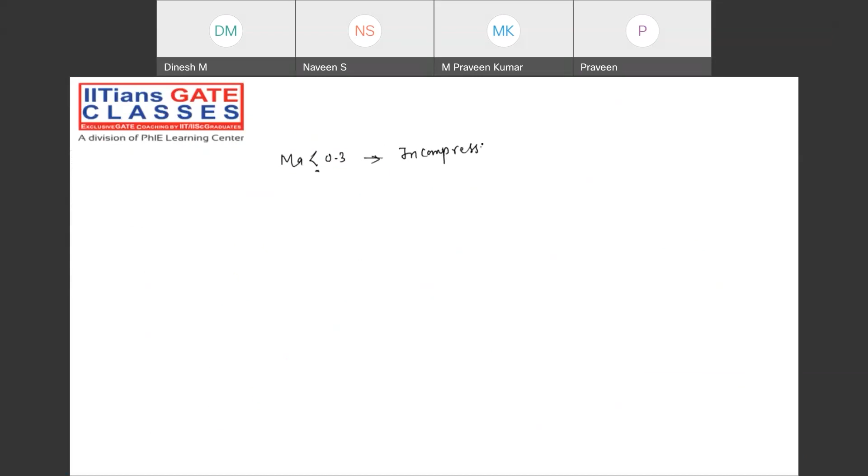If Mach number is more than 0.3 but less than 1, then we say it is subsonic flow. If Mach number is exactly equal to 1, we say sonic flow. In this case, velocity will become C.

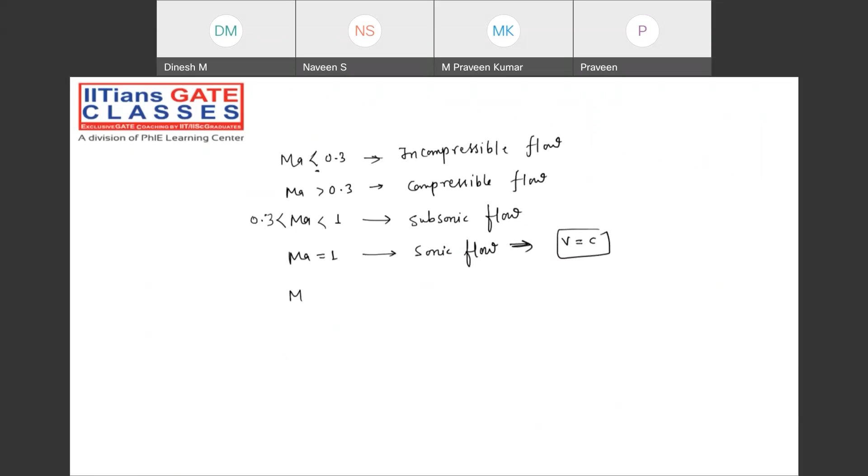If Mach number is more than 0.8 but less than 1.2, then we say transonic flow. When it is in between 1 and 5, we say supersonic flow. When Mach number is more than 5, that is hypersonic flow.

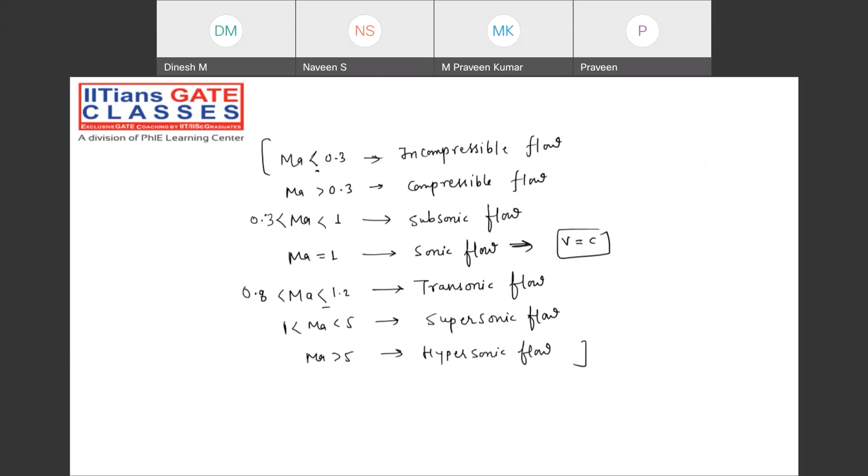Note down the variation of the fluid velocity with the flow area. We can also write this as flow through a variable area duct. While discussing this concept, a very important conclusion I want to conclude from here.

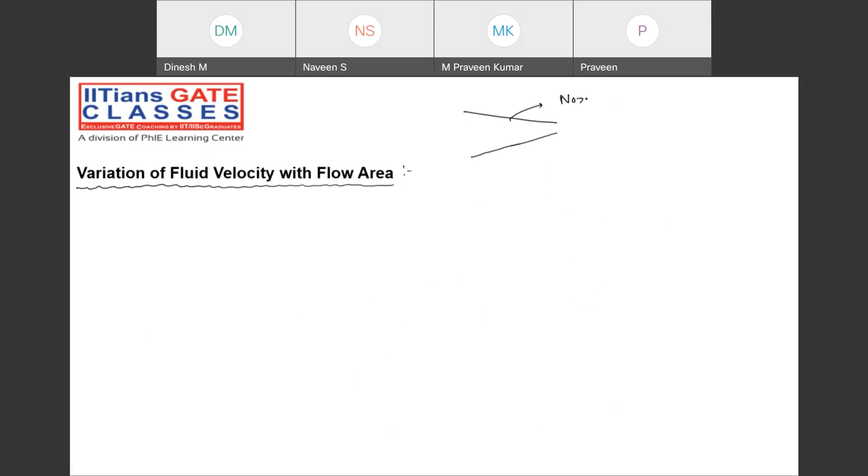Can I say a converging duct always has to be called a nozzle, or an expanding duct always has to be a diffuser? Whether true or false? When I say a converging duct always to be called a nozzle, and an expanding section always to be called a diffuser, is it true or not true? Direction is here, understand?

Note down, you know that the mass flow rate is equal to rho into A into velocity. So in incompressible flow, when we talk about incompressible fluid, and of course incompressible fluid becomes incompressible flow, density will be constant. So A1 V1 equals A2 V2.

The moment we try to decrease the area, the velocity will increase. The moment the velocity increases, what is the function of the nozzle? To increase the velocity. That duct will always be called a nozzle.

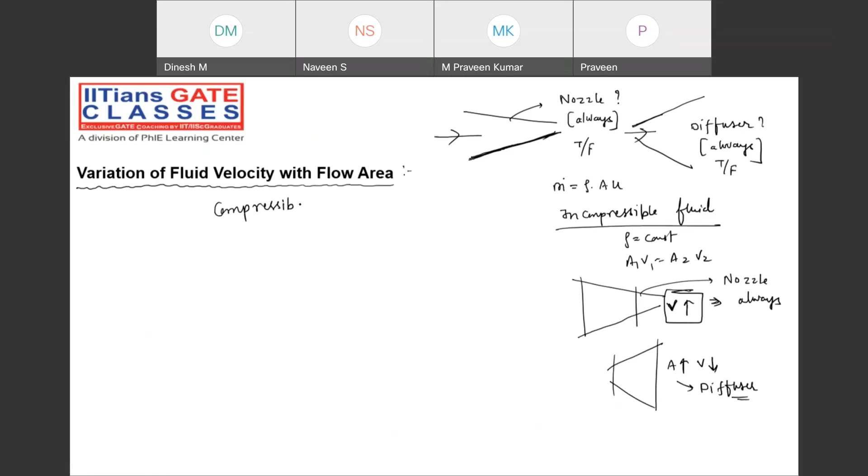But the moment you enter the world of compressible fluid, these things are not true. These things are only true with respect to incompressible fluid. My dear friend, rho will also change here. If rho changes, along with area and velocity, we have to consider the density also.

In that case you have one formula, note down: change in area equals M square minus 1, where M is Mach number, square minus 1, into dV by V.

Suppose I'm considering one duct like this, a converging duct. I don't know the name, whether it is a nozzle or diffuser. My Mach number at the inlet section is more than 1, meaning supersonic flow is happening through this converging duct. Now tell me, dA by A, whether it is positive or negative, less than 0 or more than 0.

For this converging duct, whether dA by A is more than 0 or less than 0? Tell me, guys. Less than 0, that's right. If that is going to be less than 0, this is positive, this is negative. What about dV by V? Will also be negative. That means, suppose here velocity is V1, here velocity is V2, V2 will be less than V1.

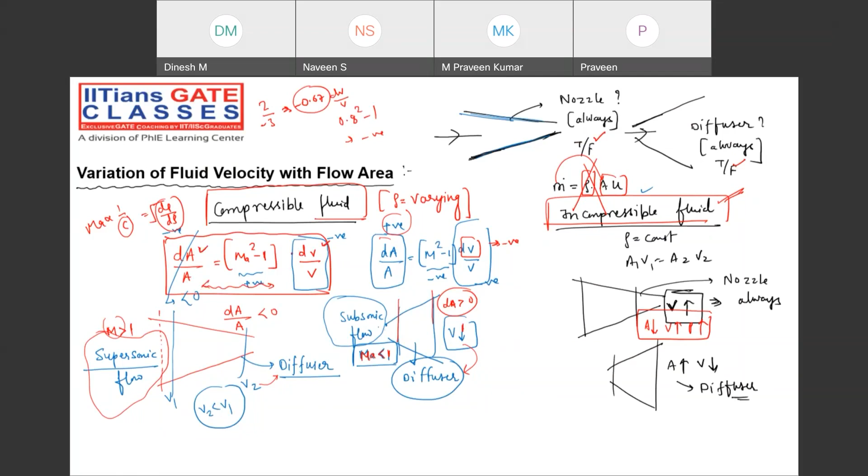So this relation is giving rise to how the area has been changing with respect to change in velocity, and how the change in velocity is happening with respect to change in area. And that is being related with the Mach number. Done? Done?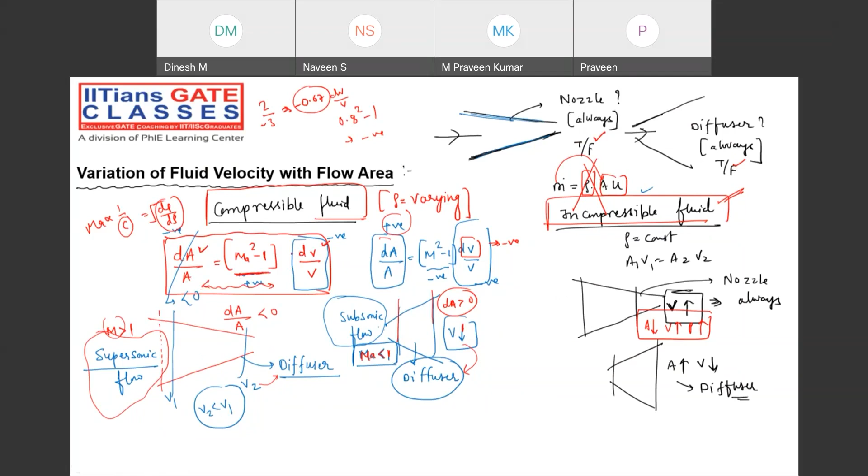Suppose Mach number is less than 1. Using the formula m square minus 1 into dV, for this first case, area is decreasing. This is negative, and this term is also negative. Negative into negative becomes positive.

So velocity will increase. That means this is a function of the nozzle, and that's why we are saying it is a subsonic nozzle, my dear friend.

Velocity will increase, so Mach number will also increase. What is Mach number? Velocity by sound speed, c. V will increase, so Mach number will also increase. Understanding my point or not? All of you understanding?

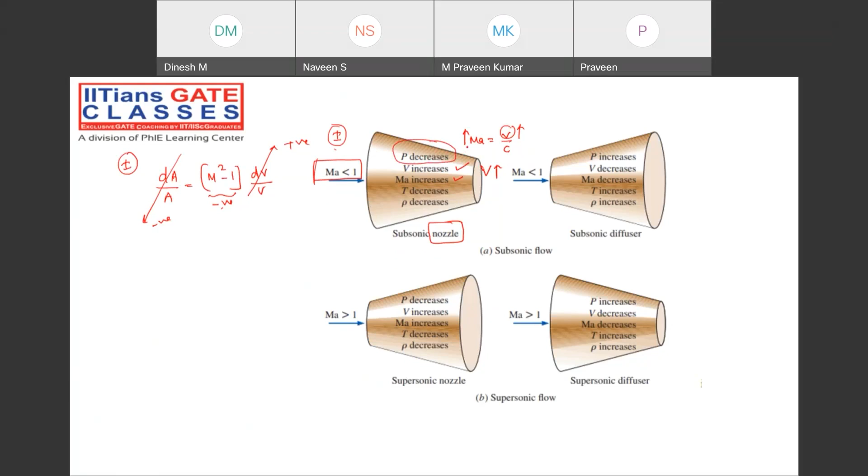Very, very important, guys. Now here, what is happening with the pressure? Pressure is decreasing. When velocity will increase, pressure will decrease. Yes or no, guys? From the Bernoulli perspective also, you got to know that whenever velocity increases, pressure will decrease.

Understanding or not? Yes or no, guys? When pressure will decrease, temperature will also decrease, and density will also decrease. This is a very, very important and fundamental thing.

Just note the second figure and try to conclude whether you're understanding or not from this area ratio formula. By this area ratio formula, are you understanding or not? Check it out.

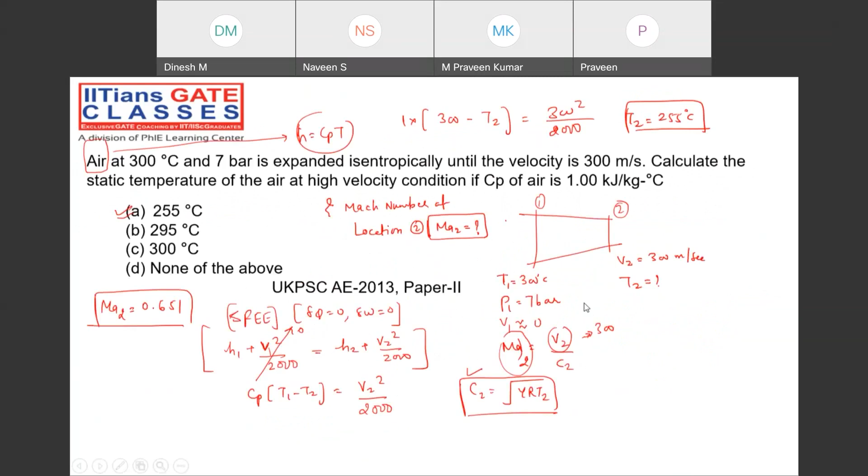Positive, negative, that means what? M square minus 1 will be negative. What about M? It is resembling which case? Check it out. Where we have the diverging duct, but in the diverging duct, velocity is decreasing.

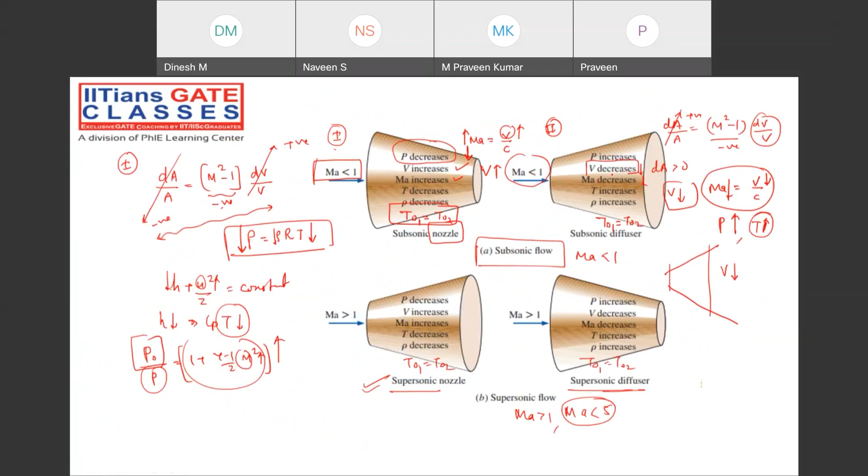Diverging duct, but velocity is increasing - that's a different case. So we have to take the second case, where velocity is decreasing. In that second case, what is the Mach number? Less than 1, right? So at the inlet condition, subsonic flow might be happening, right? Yes or no, guys? Yes.

Perfect. So I think for today's session, that is more than sufficient. Let me just leave this class with one question, the last question.

If you have a converging nozzle, assume that with the help of the nozzle we are able to increase the velocity. When we are able to increase the velocity with the help of a nozzle, then why do we need a converging diverging nozzle, a CD nozzle? If a converging nozzle alone can increase the velocity, then why do we use a convergent divergent nozzle to achieve supersonic speed, a Mach number more than 5? Why? What's the reason for that?

In fact, we can have a supersonic nozzle also, where velocity can be increased infinitely large. But why are we not using that in actual conditions? Why are we employing a CD nozzle instead of a C nozzle, a converging nozzle?

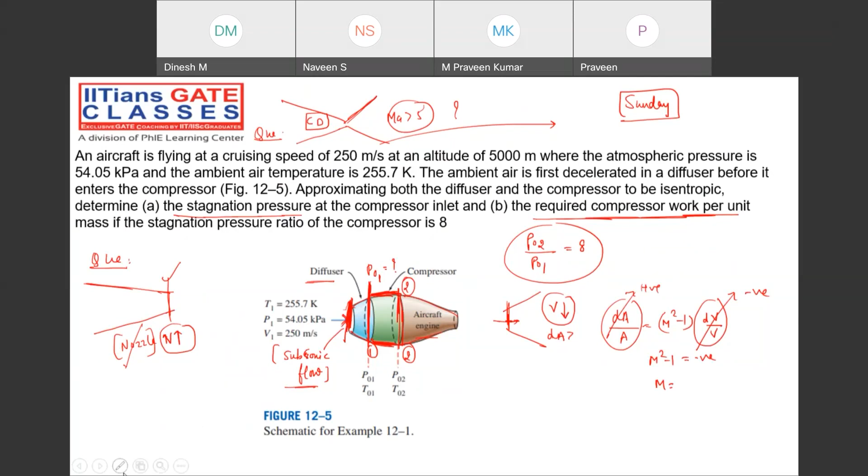Yes. Flow is subsonic only. Suppose in both cases, CD and C nozzle, in both cases subsonic flow is there.

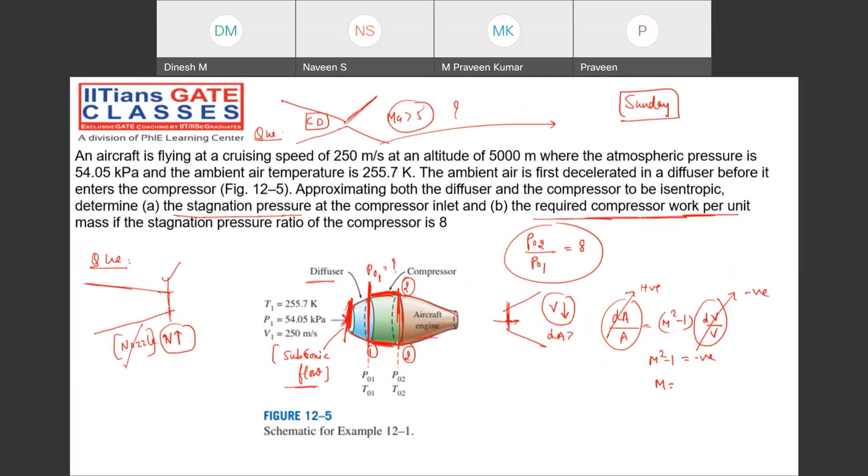The subsonic flow, I need to convert to what? Supersonic. Remember, my dear friend, in the convergent nozzle, with subsonic flow, in the first case, you can increase the Mach number up to maximum 1. At the exit, you can get maximum to sonic speed.

If you want to achieve supersonic speed, we have to attach a diverging portion like this. That's the reason we call it a CD nozzle. Understanding my point? That is what our next segment will be, right?

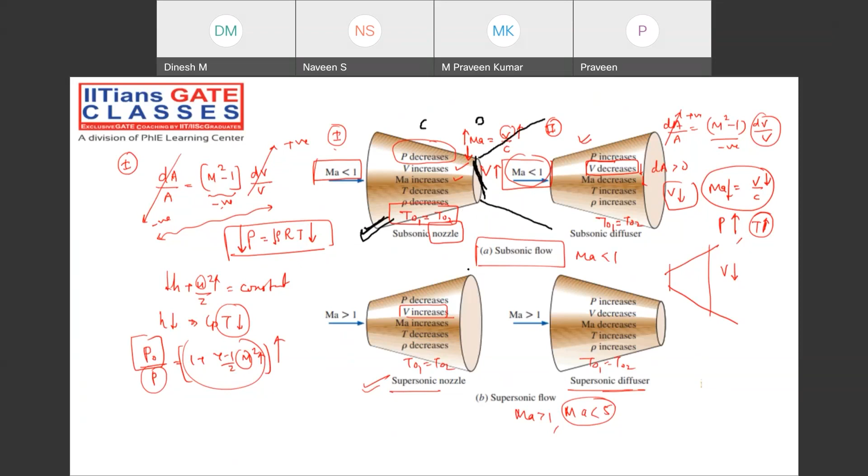Did all of you understand today's lecture comfortably? Most of the fundamentals that will be asked in the examination we have already covered, but the extra thing is a bonus for you guys.

Whatever shock wave we are going to learn - normal shock, oblique shock - two types of shock are there. One is perpendicular to the flow, one is at an angle to the flow. The shock which happens at an angle to the flow can be an oblique compressive shock or it can be an expansion shock, right?

Why is the missile shape diagonal? Why is the aircraft shape not diagonal? What is the difference between missile and aircraft? Why is the shape different? A supersonic aircraft has a different shape than a subsonic or sonic aircraft.

Why is it so? All these things depend on how the shock waves are happening in that case. And why the shock waves are happening, that is also one of the important questions, right? So done. Okay guys, thank you, right?

What are you asking, according to you? A paper - which paper, which examination paper are you asking about? ESE. Okay, so for ESE, basically...